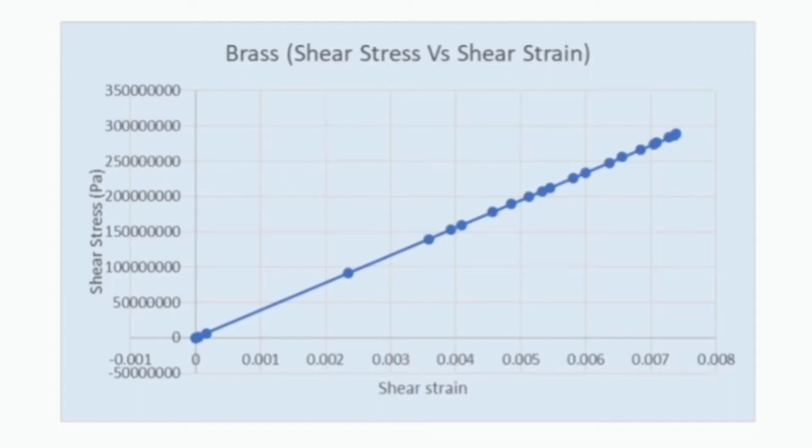So this is the differences of experiment and reference for modulus of rigidity, Poisson ratio and maximum shear stress. It does not have much difference but not accurate enough. Possible error is maybe because the specimen is not tightly enough, the specimen being bent, and the angle of twist at too rapid a pace.

The behavior of this material is that shear stress will equal the shear strain. It will lead to yielding shear stress and to the ultimate stress and fracture of the specimen.

Yes, the Hooke's law for shearing stress and strain is valid. This is because the stress is directly proportional to strain, and the graph of shear stress versus shear strain is a straight line, but only up to the proportional limit of the material.

The tested specimen has a metal fracture surface with a smooth appearance. The mode of failure under torsion is brittle fracture because brittle fracture occurs most in metals with high strength and low ductility.

Hollow bar is able to resist more torque than solid bar. This is because solid bar is stiffer than a hollow bar with the same cross-sectional area. The polar moment of inertia for the hollow bar is lesser than a solid bar, so the resistance to twist or rotate is less.

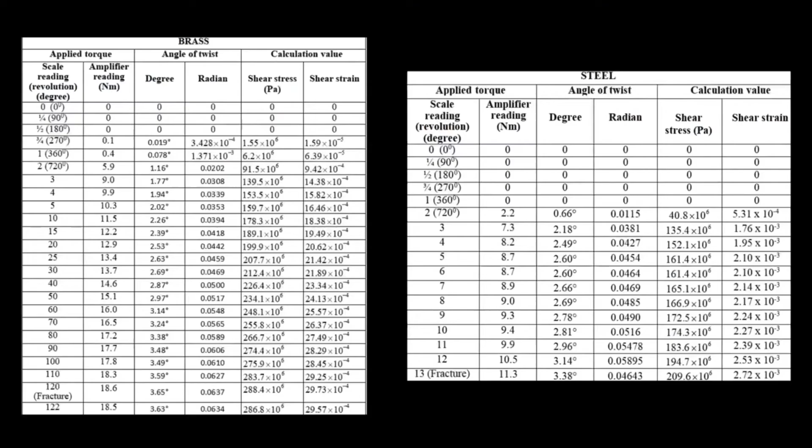These are the differences between the result for the experiment and the reference for modulus of rigidity, Poisson ratio, and maximum shear stress. Based on the result from the reference and the experiment, the modulus of rigidity is the only value that is the same. However, Poisson ratio and maximum shear stress are different.

The value from the experiment is much smaller than the reference. The different values could happen because of the error occurred during the experiment.

For example, a systematic error occurred during reading the torsiometer, and a random error when the condition of the tested specimen changes during the experiment due to changes in the atmosphere.

Both of the tested specimens change when the torque is applied on them. When the torque is applied, the material will twist in the direction where the torque is applied. One of the things that will occur is the angle of twist of the material will be directly proportional to the torque applied.

Yes, the Hooke's law for shearing stress and strain is valid. Hooke's law is when the stress is directly proportional to the strain, and based on the shear stress and shear strain graph, both values increase directly proportional to each other. After the proportional limit changes, that's where Hooke's law ends.

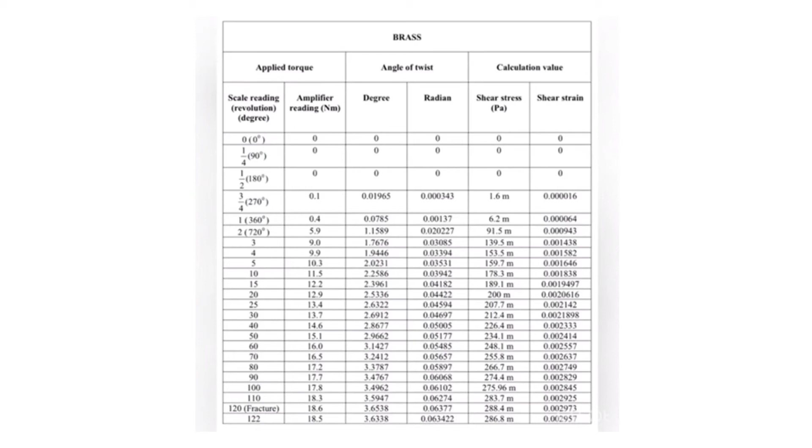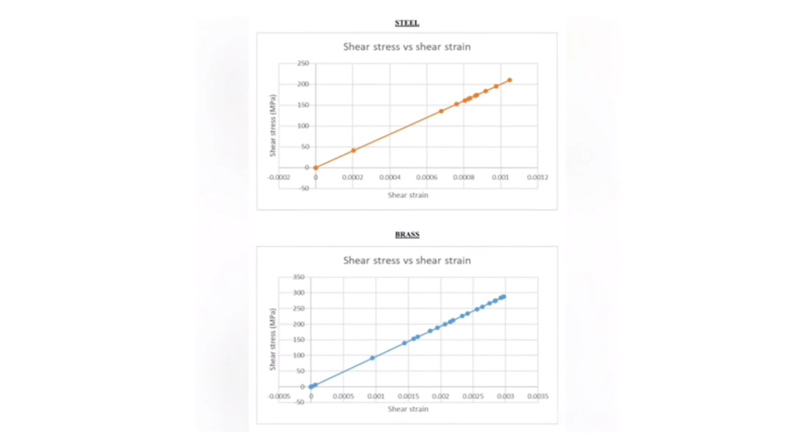Second, the discussion for my lab report about the torsion test, number 1: compare the result of this test between the experiment and reference standard value of modulus of rigidity, Poisson ratio, shear stress and shear strain.

Comment on any differences and possible sources of error. There are some errors in the experiment result, and the cause of the error must be that when the torsion test is held, the specimen may have some glitch on it, and some error comes in calculation on decimal places.

Second question: describe the behavior of this material as it responds to increasing applied torque. Steel has more hardness than brass, but steel is more brittle than brass.